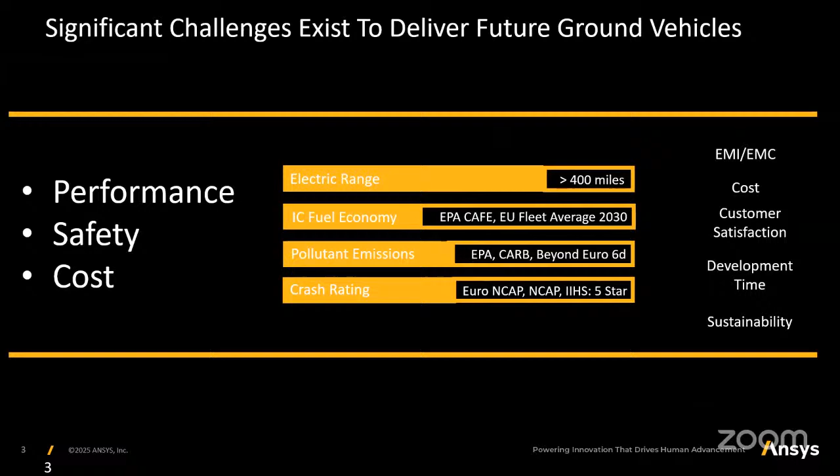Now, for the automotive manufacturer, the requirement is to speed up the design cycle so the product can be launched faster in the market, and at the same time it should be innovatively designed, so that new and unique characteristics give a competitive advantage over contemporary competitors and better customer acceptance because of these unique selling points. And when we develop the product faster, we are compressing the development cycle and making the products innovative.

We should also keep a tab on the development cost so that it does not increase too much, which would eventually increase the burden on the customer. So we need to make sure that the targets related to cost, weight, size and sustainability are met without increasing the overall cost of the vehicle.

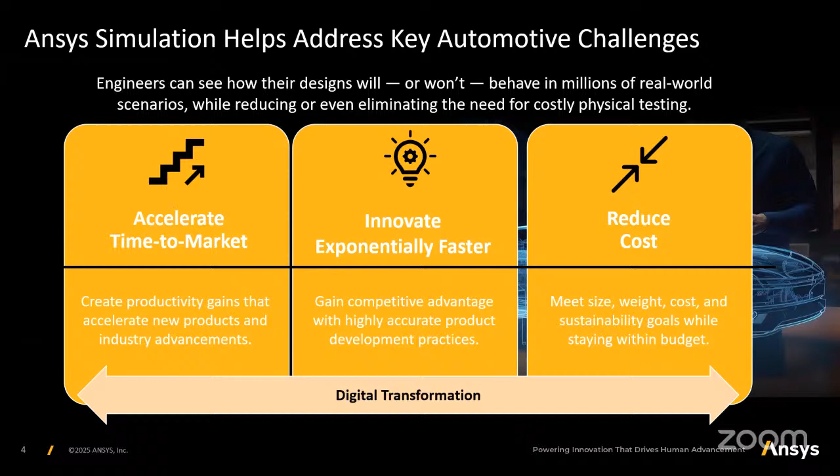So for that, the digital transformation will play a key role, and especially the Ansys simulation solutions will definitely help to address these automotive challenges. So if I just quantify a couple of benefits which customers would have seen by using simulation in the development of ground transportation vehicles, one is the gain in performance.

So if we have best practices employed and optimized settings and optimized design practices, then it will help us to increase simulation productivity. That means that in the same span of time, customers can now perform more and more simulations.

That means the customer now has the flexibility to evaluate multiple designs and all the possible scenarios before the product is manufactured or before the first prototype is built. So that will help to get optimal solutions, and that will also help to reduce the product development time significantly.

Another benefit the customer can see using simulation is a significant reduction in the product development cycle or design time. One of our customers based in North America, in the business of engine manufacturing, employed simulations and was able to run multiple design iterations upfront within days instead of months, speeding up their product development cycle significantly without compromising the quality of the product.

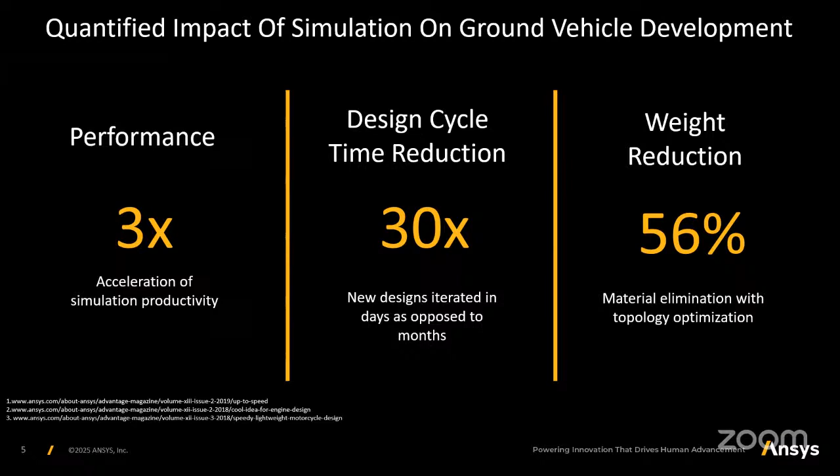In addition to these three use cases, there are multiple other avenues for conventional as well as electric powertrain vehicles to have better innovation at lower cost. Nowadays there is a lot of momentum for EV cars, and EV cars typically have batteries as well as e-motors. How efficiently we choose the battery packs and how we manage the thermal management of these batteries plays a very crucial role in the safety as well as the performance of the electric vehicle.

And we know that these electric vehicles will have the e-motor as the powertrain source, so the optimum design of electric motors using simulation also plays a crucial role. We can also employ simulations to make lighter vehicles, so that when the vehicle is lighter, its speed will be higher, but at the same time we should make sure that safety is not compromised. By using the additive manufacturing technique, we can design lightweight components and at the same time make sure that safety is intact.

Customers nowadays require that the noise emission from the vehicle be as low as possible, because that is one of the comfort parameters. It is no longer a luxury; noise comfort is one of the key attributes of automobiles. So by using simulations, we can improve the NVH design of these automobiles.

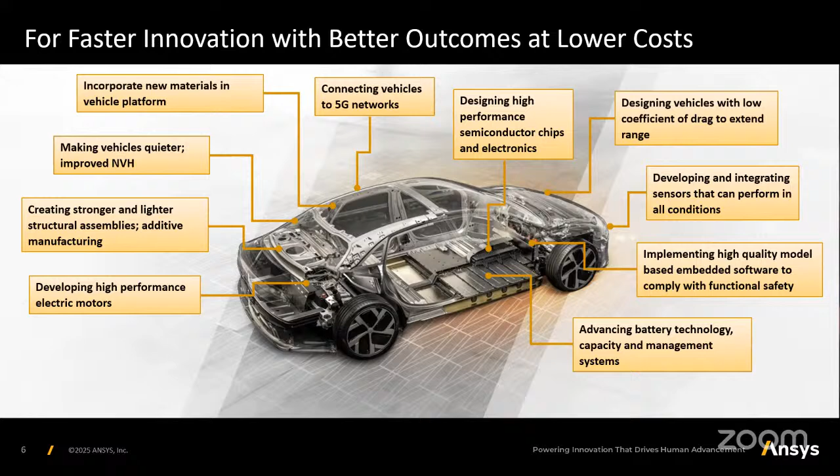So these are a few avenues where simulations will certainly help to have better innovative products, but at a lower cost. Let me now go one by one about how ANSYS can help to better design automotive systems and subsystems. If I broadly categorize vehicle engineering, it can be classified into five subcategories.

First is the exterior part. Next is the interior part of the automobile. Then is the chassis, followed by the powertrain, and the last one is electrical systems.

When we talk about exterior systems, it covers the aerodynamics part, external aeroacoustics, vehicle thermal management, dirt and water management, and lastly structural integrity.

When we talk about interior aspects, it covers the thermal comfort required by the passengers and co-passengers sitting inside the car, and crash worthiness of the vehicle is also very important, because whoever occupies the car should be safe enough in any eventuality. If there is a frontal collision or a side collision, passenger safety should not be compromised.

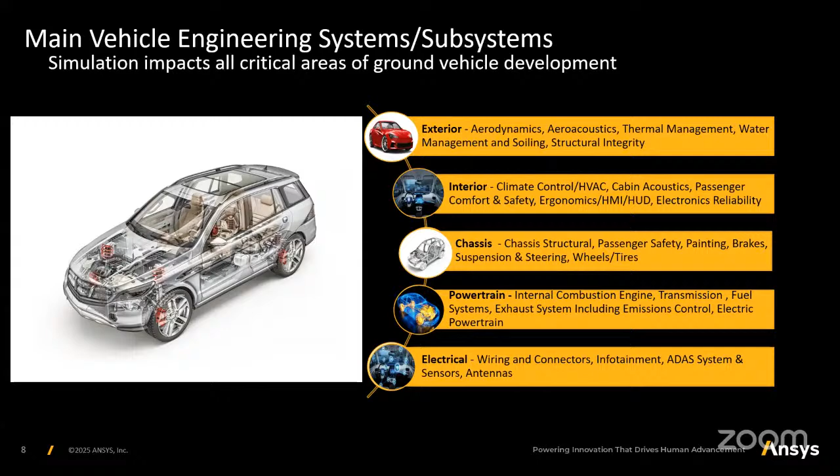There are lots of electronics gadgets or displays seen in modern automobiles, because more and more electronics is taking part in vehicle performance. And the entire vehicle is built on the chassis, so chassis structural integrity is equally important. We'll cover these aspects in detail in the subsequent slides.

Coming back to the first part, about how simulation will help achieve better exterior component performance. When we talk about exterior systems, mainly we talk about aerodynamics, aeroacoustics, thermal management, dirt management, water management, and structural integrity.

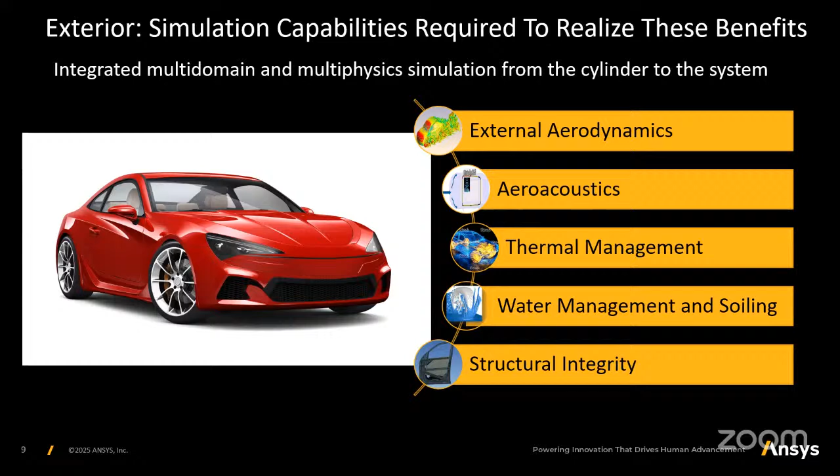We can use ANSYS CFD solutions, especially to optimize the drag coefficients or reduce them, so that the fuel economy of the conventional IC engine powered vehicle is improved. And if it is an electric powertrain vehicle, lower drag automatically means the range of the vehicle will increase, with less parasitic losses.

With the introduction of the Worldwide Harmonized Light Vehicle Test Procedures, it's important that all multiple configurations of automobiles are evaluated upfront and reported for drag coefficients, which affect the CAFE—corporate average fuel economy—or overall fuel economy. Using simulations, we can study these drag coefficients, optimize them, and identify the regions causing high drag in the vehicle so we can take corrective actions.

The next is acoustics. Acoustics is also a very important attribute in the selection of the automobile, especially in passenger cars. There are norms coming up like pass-by noise, and the passenger comfort parameter is decided by the noise coming from the engine as well as from external components.

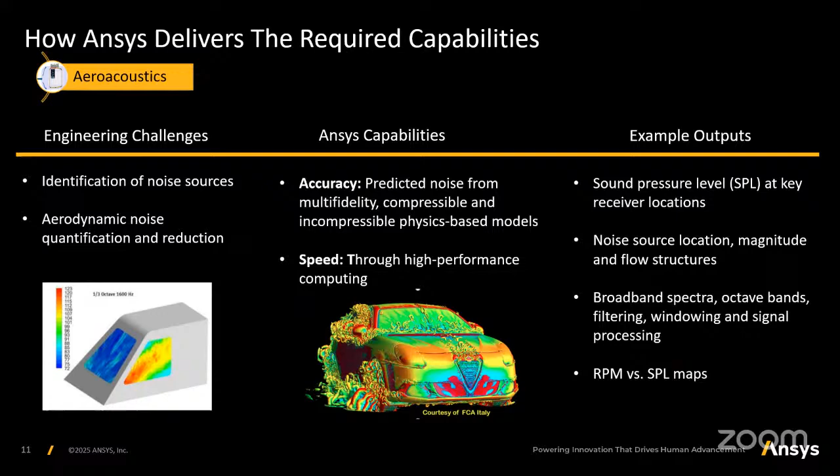We can study this aeroacoustic aspect of noise using CFD simulations, and we can quantify the noise sources and take corrective actions to reduce aerodynamic noise. We can use LES-type simulations using ANSYS Fluent, and calculate the noise at a distance—whether inside the vehicle or at co-passenger level—using this computational acoustic approach, and calculate the sound pressure level at receiver locations to make sure it is within acceptable limits.

Next is the requirement of thermal management. When a vehicle is there, inside the vehicle under the hood there is an engine, and the engine is the hottest component. It can radiate heat or convect heat to the adjoining components, which could be made up of plastic or rubber. If the temperature exceeds a certain specified limit, those components can underperform or get damaged and need to get replaced. So the objective of this thermal management study is to see the temperature of the adjacent components around the engine and make sure the temperature is not exceeding the specified limits.

Providing adequate cooling is also another requirement for the underhood thermal management system and the front end airflow systems. So using conjugate heat transfer simulations in ANSYS, one can evaluate the underhood thermal performance or thermal management of the vehicle and study whether it is adequate enough or needs any improvements.

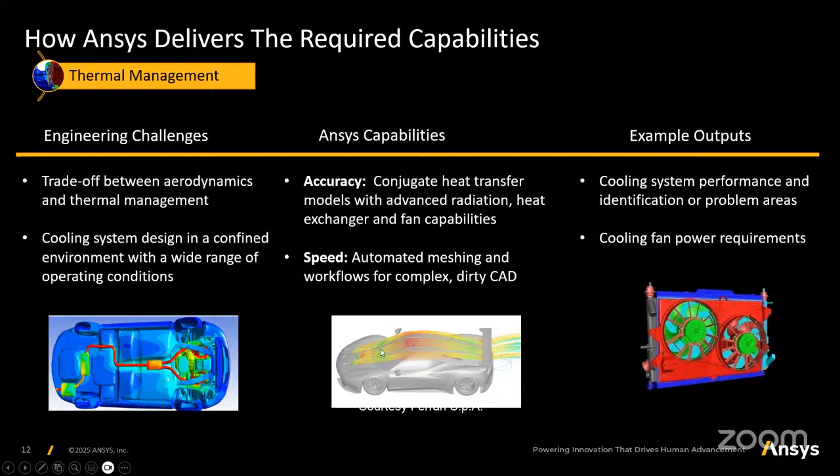The next part is the management of dirt or vehicle soiling. Especially when there are lots of sensors in the vehicle for its efficient operation, it's important that we study whether it is impacted by dirt or any adverse environment that it's able to handle or not.

So we can perform multi-phase simulation using ANSYS technology, especially ANSYS Fluent, to study the trajectory of soil particles or water droplets to see whether water is reaching the sensors and whether it is blocking the path or causing any damage to the sensor. Those kinds of scenarios will be easily evaluated using ANSYS simulations.

And especially if some film formation is happening, we can also quantify the extent to which the film is getting formed on the vehicle and on the sensor surface, because it can detrimentally affect the performance of the sensors. So it is important to evaluate whether the sensors are performing well in all conditions or not.

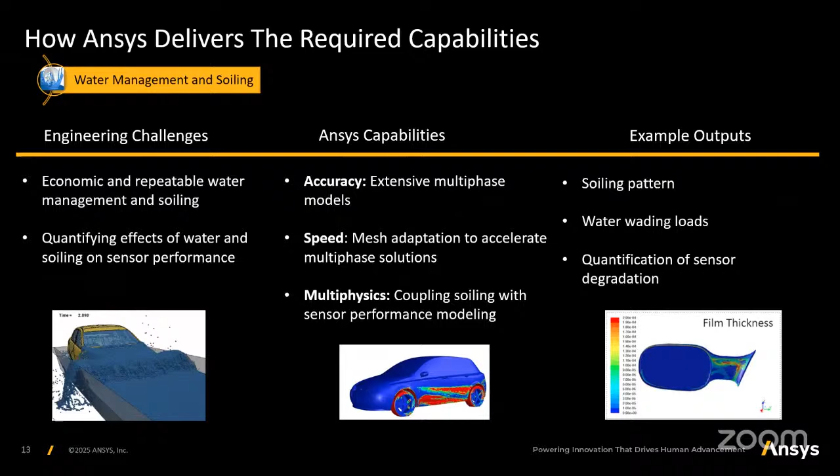The next aspect we can study using simulation in vehicle engineering is structural integrity or structural rigidity. That can be easily studied using simulations like ANSYS Mechanical.

The objective here is whether we are able to optimize the weight, and indirectly cost, without compromising the safety of the passengers. So we can perform structural integrity simulations using mechanical or crash simulation as well, and we can also study the durability of these components.

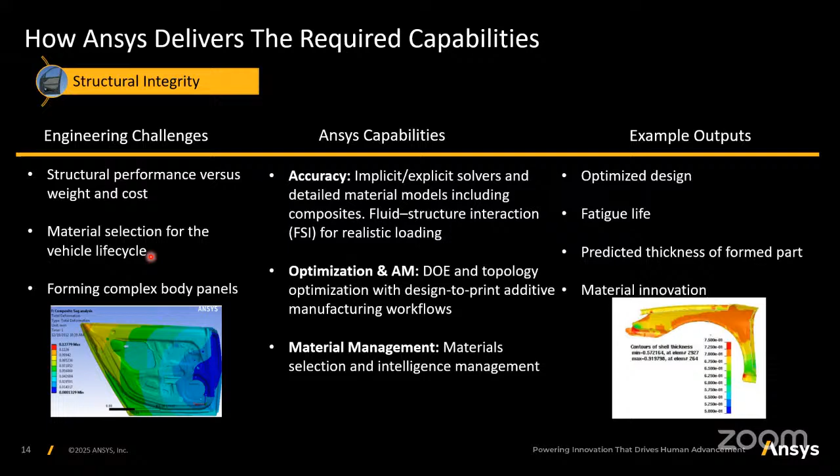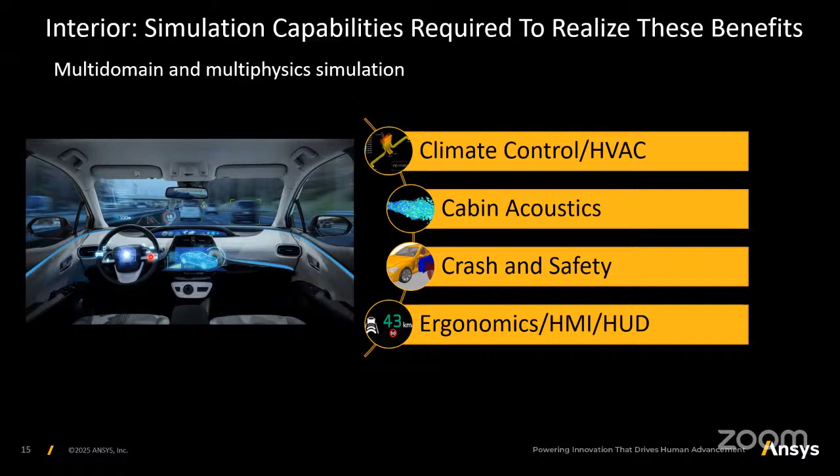The next aspect is interior vehicle engineering, which comprises climate control, cabin acoustics, crash, and ergonomics. Climate control is nothing but the vehicle's HVAC systems, or heating, ventilation, air conditioning systems, which are essential for passenger comfort, especially in colder geographies or colder weather. It should provide adequate heat, or when driving in hot summer, it should provide adequate cooling, so that passengers don't feel too hot or too cold.

That can be addressed using typical HVAC systems. Especially when driving in the rainy season, we see some kind of fogging happening on the front glass, and if that is not cleared up, it can affect visibility and there's a possibility of accidents. So defogging, and especially in cold environments where snowing is happening, de-icing is also a very important attribute of this HVAC system.

Using flow simulations, we can study the effect of air quality as well as the temperature near the seats which passengers experience, and accordingly modify the design so we can get better air quality as well as better temperature control around the passengers. We can also make sure that the defogging and de-icing system is working as expected.

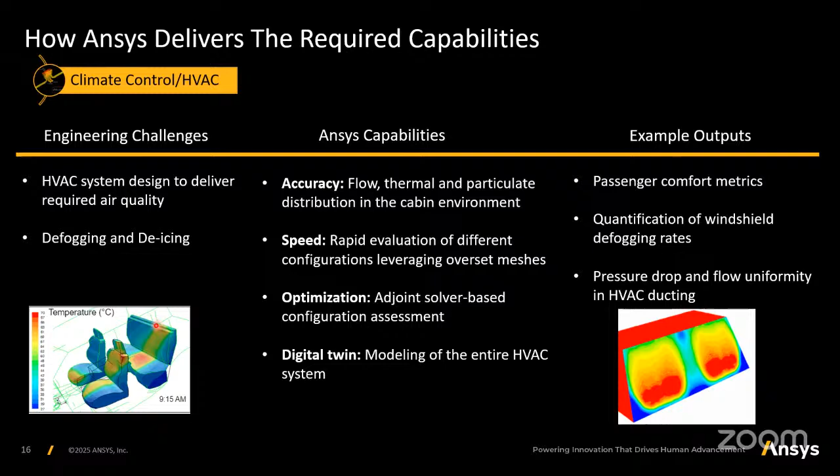Next part is related to acoustics. Passengers inside the car experience noise because of the side mirrors or external flow. This noise is transmitted to the glass panels and eventually heard by the drivers and co-drivers.

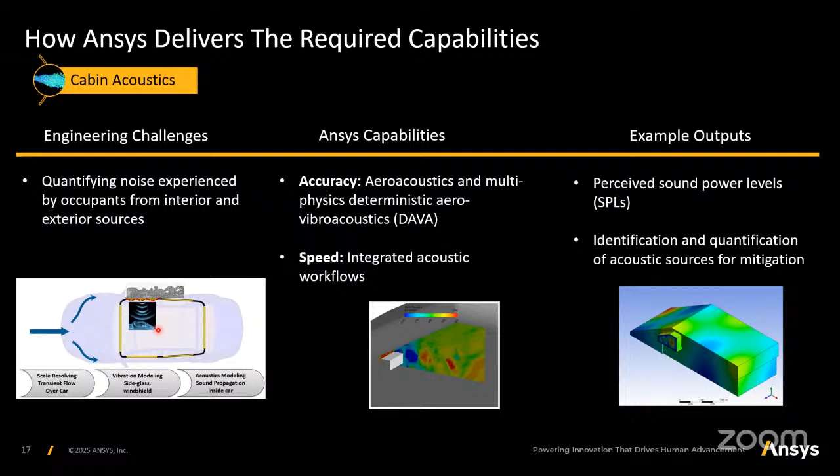By using the deterministic aero-vibroacoustic approach, we can study how noise is generated external to the vehicle and how this noise propagates from the exterior to the interior of the vehicle. We can estimate the sound pressure level at the passenger and co-passenger positions, and adequately take corrective actions to reduce the noise if it exceeds the specified limit. So we can get all the sound pressure level parameters and the location of the noise sources using simulations.

Another important aspect I mentioned earlier was crash worthiness. Passenger safety is paramount, especially in automobiles. In the event of any frontal or side collision, it is important that the airbags open in adequate time so that passengers do not have any major damage. That is the goal of crash worthiness.

By using simulations like LS-DYNA, we can check whether the crash worthiness of the vehicle is adequate or needs design modification. We can perform weight optimization without sacrificing the safety of the vehicle. These kinds of studies can be performed using simulations, especially LS-DYNA type simulations.

These crash tests are very costly in nature. If manufacturers typically have hundreds of variants, testing each one will increase development costs. Once the vehicle is damaged, it can no longer be salvaged or used—it's like destructive testing. So by using simulations, we can minimize the number of such expensive physical tests.

The next aspect of vehicle engineering is the chassis. The chassis comprises the entire body where different systems or subsystems are hosted. Important aspects of chassis design include structural integrity, crash worthiness in case of accidents, and dip painting or coating of vehicles before delivery. The effectiveness of painting can also be studied using simulations, and the performance of subsystems such as steering, suspension, or brake systems can be evaluated, as well as wheels and tires, all using simulation tools.

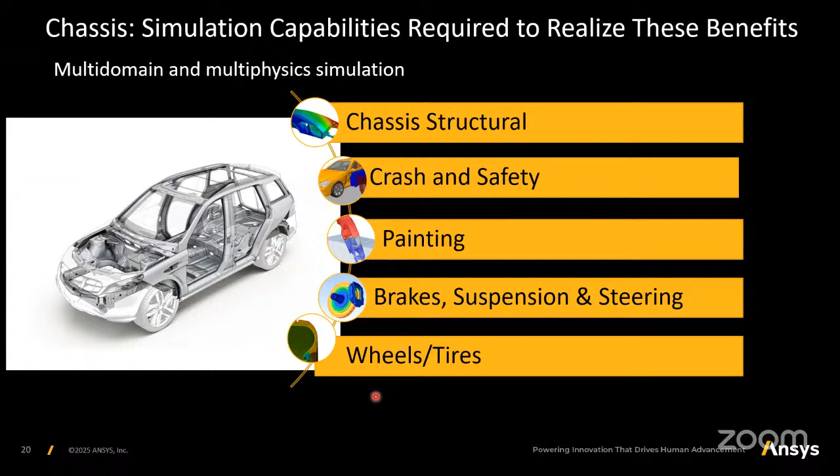First, let's talk about structural integrity of the chassis. It's important to maintain adequate strength without over-designing the vehicle, while optimizing weight so it doesn't increase cost or require excessive tooling or material cost. We can also appropriately choose materials for specified performance using simulations, and study the effects of wind loads or fluid-structure interaction when designing the chassis.

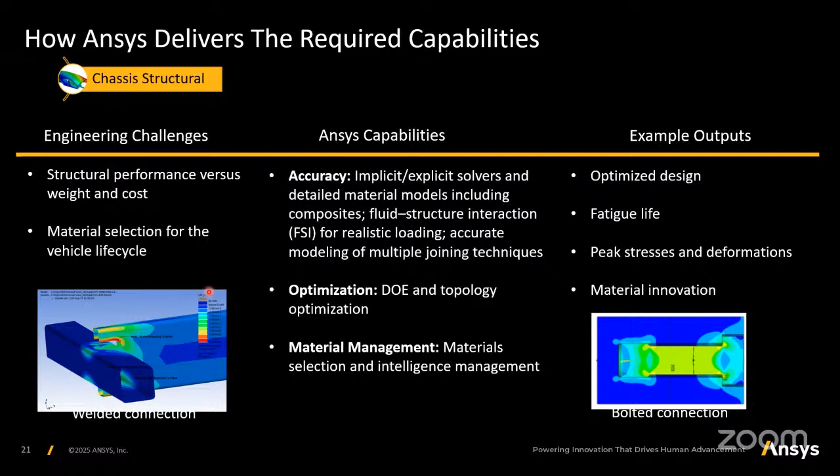The next aspect of chassis design is crash and safety. As mentioned earlier, regarding interior safety of co-passengers or drivers, in the event of a side or frontal impact, the vehicle chassis must be sufficiently resilient so that collisions are absorbed by the chassis itself and passengers inside remain intact. Using simulations, we can study all these aspects and significantly reduce expensive physical testing.

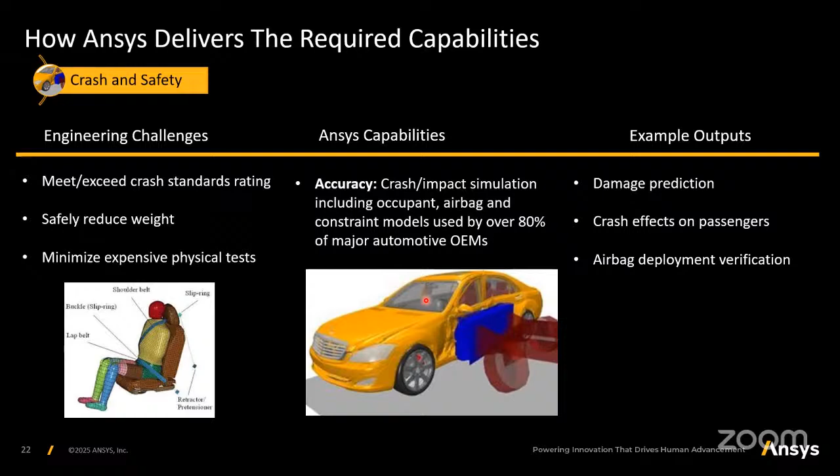For vehicle subsystems such as brakes, suspension, and steering, we can study thermal aspects of the brake or suspension systems, checking whether the heat generated during braking is dissipated adequately or if it could cause durability challenges if not managed properly. All these scenarios can be studied using simulation techniques.

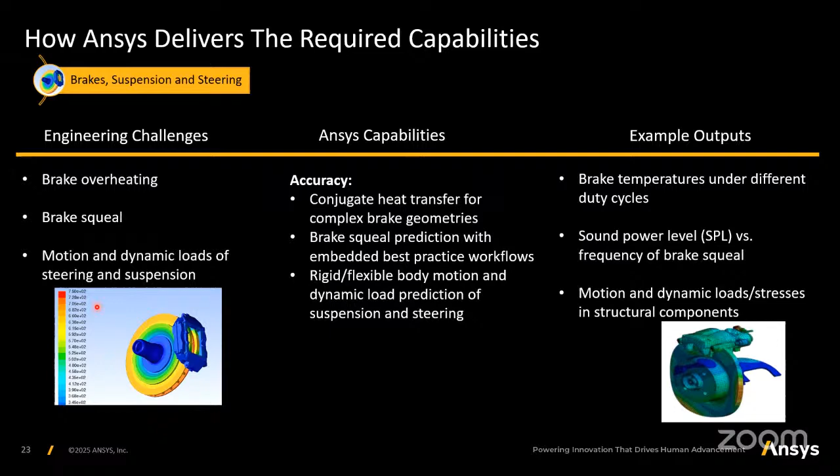Apart from thermal performance, brake squeal is another attribute we can evaluate using simulation—that unwanted noise, which we call squeal, can be calculated using simulations and addressed using simulation techniques.

The next aspect about the chassis is the painting part. It's important to study whether, when the vehicle goes through dip painting, any air pockets form. If air pockets occur, the quality of paint will be inferior in that region, leading to blind spots and requiring rework. This reduces the throughput of the production line and reduces the total number of vehicles produced in a given span of time.

To increase manufacturing productivity, we need to make sure these manufacturing processes are optimized and efficient enough. We can study this painting process using simulation technology like multi-phase simulations as well as thermal simulations, to see whether dead zones or air pockets are forming, how much time the dip painting activity takes, and how much time it takes for the paint to dry using the thermal part. All these aspects can be studied using simulation.

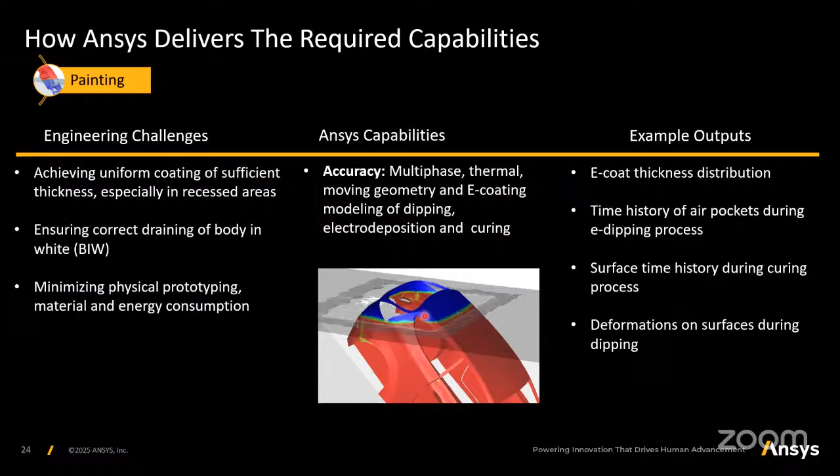When designing wheels and rims, we can optimize them for better weight, and check whether the material is good enough, and whether tire performance like the contact patch is good, whether rolling resistance is appropriate, and the footprint. We can also study noise generated because of hydroplaning effects, inflation of the tires, or rolling. All these aspects can be studied using simulation.

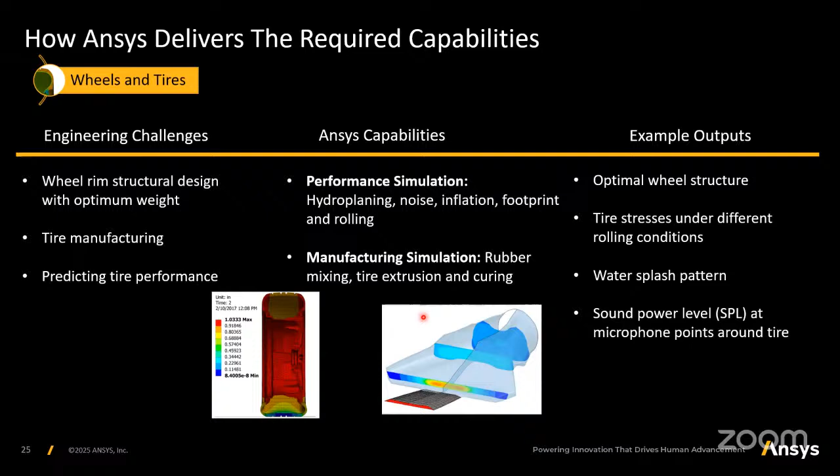The next aspect is related to the powertrain of the vehicle. Typically in the conventional powertrain, the internal combustion engine is the main source of power. In electric vehicles, the electric powertrain or e-motors are the source of power. Despite whatever the source of power, transmission would be required.

Especially if the conventional powertrain driven vehicle is there, we also need the fuel systems as well as the exhaust systems and after-treatment, because whatever exhaust comes from the engine cannot be directly discharged into the atmosphere in order to meet the emission regulatory norms.

When we want to design superior internal combustion engines, the objective is that the efficiency of the engine over different speeds is good enough, and we can study that aspect using the Ansys simulation solution called Forte. We can also study certain unwanted phenomena such as engine knock or engine noise using this simulation technique.

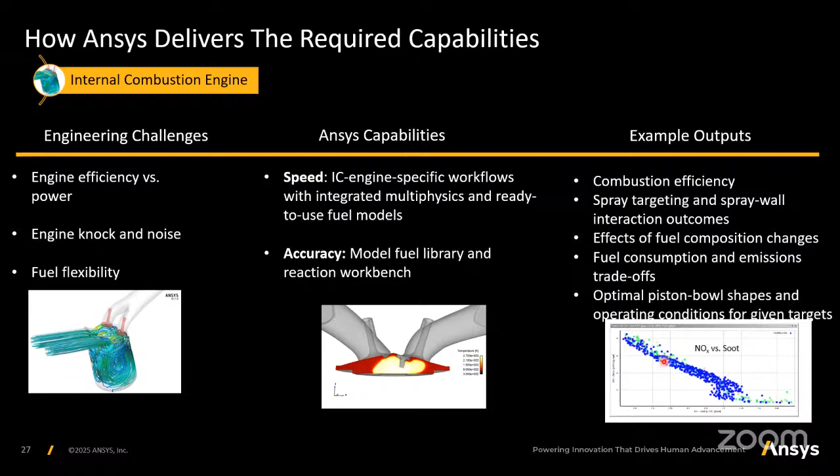We can also study, if we use different fuels, how suitable that fuel is, how much power it will generate, and what could be the consequence for noise norms. When we have different alternative fuels, we can always study their effectiveness in terms of engine efficiency, pollutant emissions, as well as other detrimental parameters like knock and noise generated. These kinds of studies we can perform upfront, before we perform the engine test bed test.

Another aspect of the powertrain is the design of an efficient transmission system. What losses are encountered in the powertrain? These affect the fuel economy of the vehicle, and eventually increase greenhouse emissions, or affect the range of electric vehicles.

We can estimate these different churning losses or viscous losses using simulation techniques, and at the same time we can also estimate the noise generated because of mating gears as well as flashing, using the NVH tools of Ansys. All these studies can be performed using Ansys Mechanical and Ansys CFD solutions.

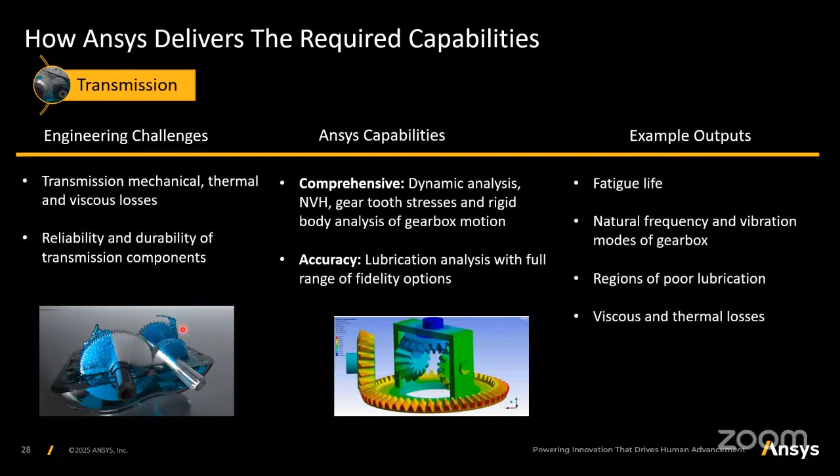In the case of a conventional powertrain driven vehicle, it's important to make sure the fuel systems we employ are efficient enough, and that the fuel injected into the combustion chamber gets atomized properly before it mixes with the air. This directly affects the combustion efficiency of the engine, and indirectly affects the fuel economy of the vehicle. The power generated out of this engine is a strong function of how good the fuel-air mix is, which indirectly depends on how good the atomization is.

We can study the effectiveness of atomization in simulation techniques, and also the flow rate of the fuel system pump delivering fuel from the tank to the engine. All these aspects help us estimate the losses and the pump efficiency. Another important aspect is the noise generated by the pump operation, which can also be estimated using simulation.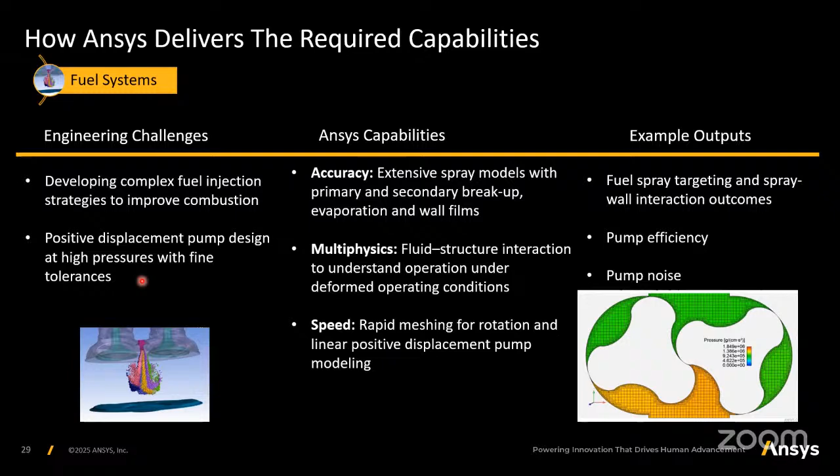In conventional powertrain driven vehicles, it is necessary to employ after-treatment devices. In petrol engines we use three-way catalytic converters. In diesel engines we need selective catalytic reduction to reduce NOx, as well as diesel oxidation catalysts to reduce hydrocarbon and carbon monoxide emissions. How effectively these systems can be designed can be studied using simulations.

These are high temperature exposed components, and because of thermal stresses, structural integrity can be compromised. So it's important to evaluate structural integrity and durability before they are productionized or employed in the actual vehicle. Using simulation techniques, we can perform conjugate heat transfer simulations to get the temperature map of these components, check if the light-off temperature is sufficient, and use that temperature map to calculate thermal distortions and whether they cause structural issues.

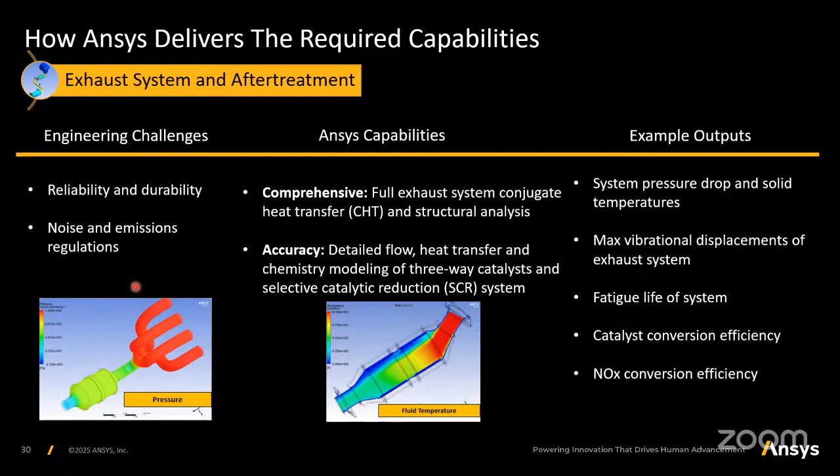In case of EVs, electric motors are used as the source of the powertrain, and we can study the cooling of these motors using simulations, whether direct or indirect cooling. We check whether the motor cooling system is reliable enough so that the motor windings or magnets are not exposed to very high temperatures for prolonged time, because that would significantly affect performance, resulting in loss of torque, loss of range, or reduced efficiency, meaning overall reduced fuel economy.

At the same time, this motor can generate noise, which affects the customer's comfort parameter. If noise is very high, it affects customer comfort, so we need to optimize for better noise characteristics. We can study temperature history and motor noise using ANSYS simulation techniques, performing CFD simulations to estimate temperature on different motor components. We can also study the electric motor using ANSYS Maxwell to study forces, and use that force information for noise signature estimation. All these effects can be studied using simulation.

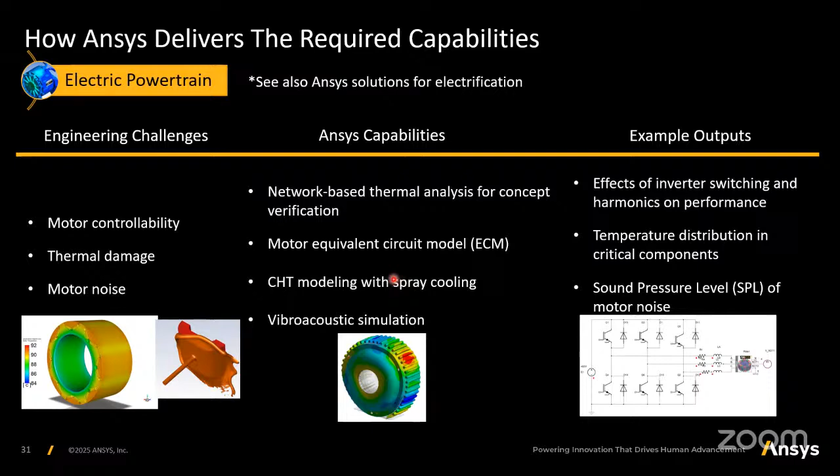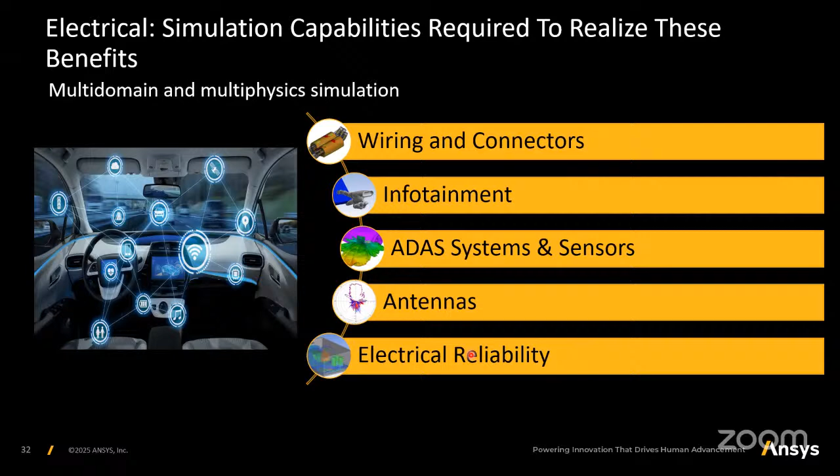Coming to the last aspect, electrical systems: lots of electric wiring harnesses and connectors are part of the modern automobile. The infotainment system is also playing a very important role and is critical in all modern automobile systems. Advanced driver assistance systems and the sensors used in ADAS or autonomous vehicles need to be evaluated critically. Since there are antennas on the vehicle to communicate between the tower and the vehicle, as well as between two adjacent vehicles, the placement and performance of the antenna also play a crucial role in the design of such vehicles. Finally, the reliability of such electrical systems is very important for consistent vehicle performance.

So by using the Ansys simulation, we can study the wiring harnesses, especially the electromagnetic interference or electromagnetic compatibility, basically using the Ansys electronic solutions. And we can study whether there is crosstalk or whether there is radiation, electromagnetic radiation, or how much is the susceptibility, how much is the immunity. So all these aspects can be studied using the Ansys electronic solutions. These parameters are very important to design the shielding effectiveness.

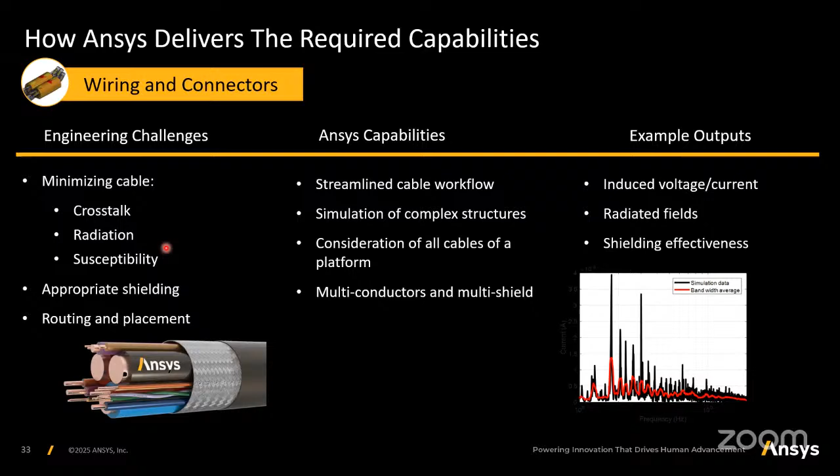Now, the next part is infotainment. The infotainment system is nothing but a printed circuit board where there will be lots of chips, and it will carry a lot of electric current. So it will generate a lot of heat, and if it is not managed properly, eventually there is a chance that this printed circuit board may get overheated or it may get bent because of the non-uniform heating and the distortion because of the high temperatures.

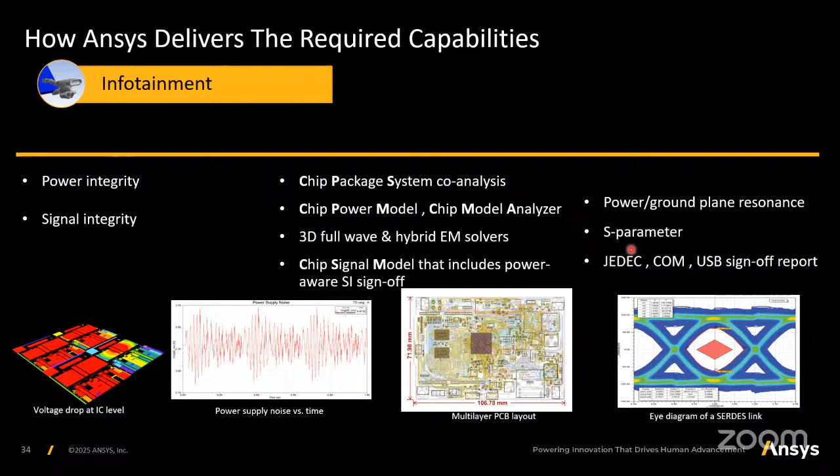So by using the simulations, we can study the chip level, package level, or all. Using the simulation, we can study the power integrity as well as the signal integrity, and we can estimate parameters such as S parameters or the resonance aspects.

So the next aspect is ADAS or the autonomous vehicle. Here the important consideration is that in any kind of eventuality, in case of inclement weather or lighting conditions like snow, rain, or night, it should perform effectively. All these sensors are placed on these vehicles to study the different parameters, so they should perform without any deterioration in performance in all weather conditions. That is a requirement.

So using the simulations, we can see all these aspects, and we can make sure that we are not getting the wrong signals and we are not getting incorrect ones, so they are performing as expected.

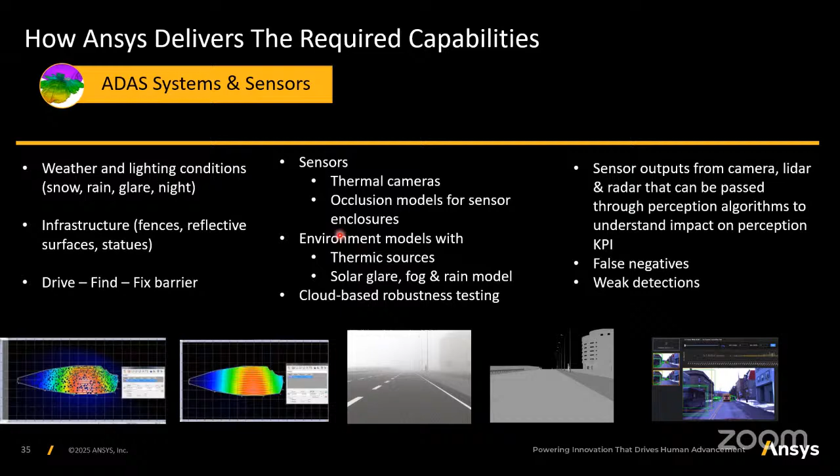Especially in the case of connected vehicles, the antennas are very critical, and they play a crucial role in the communication between the tower and vehicle as well as between two adjacent vehicles. So we can perform the placement of the antenna, and we can also study the radiation pattern of the antenna using the Ansys electronic simulations. That will help to see whether the gains of this antenna are good enough, or whether we need multiple antennas, or can work with a single antenna. All these aspects can be studied using simulation techniques.

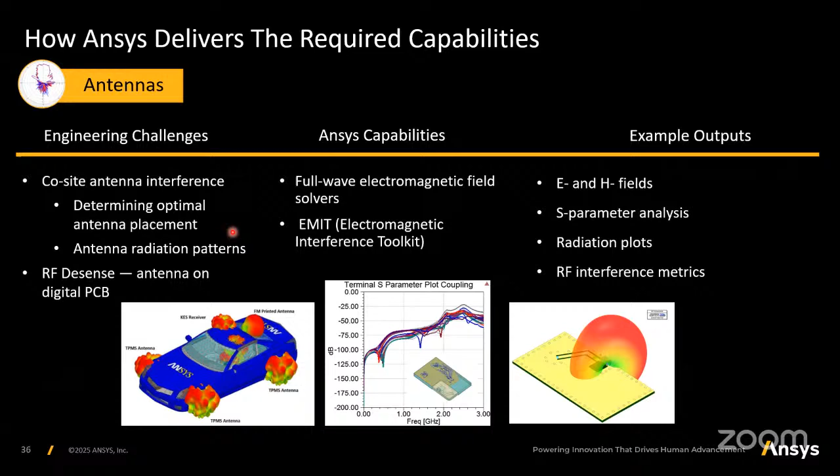Now, lastly, is electronics reliability. Electronics reliability, especially in terms of power integrity and signal integrity, is very critical, and the objective here is to increase power integrity and signal integrity. So we can study DCIR losses, or we can do the chip package system analysis using the Ansys EM solvers to see whether signal integrity and power integrity are as per expectations or not.

So these are the different outputs we can get from the electromagnetic simulation, like EMI, EMC, S parameters, or eye diagrams or waveforms. This will help electronics engineers make sure the effectiveness of this electronic system is not compromised and it is as high as possible.

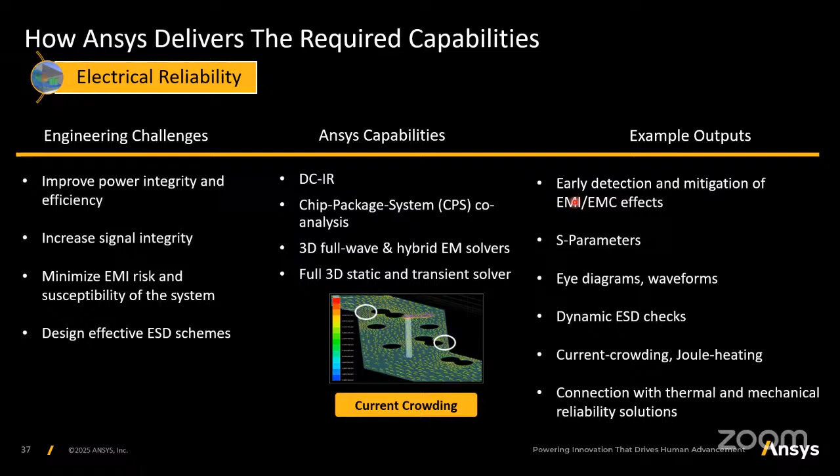So these are a couple of customer success stories where customers were able to increase simulation productivity, especially this use case by Ferrari, which is famous for Formula One racing as well as motor car racing. By using simulation, Ferrari could evaluate three times more design iterations within the same span of time. That means they could optimize the designs faster, and they could get the right solutions with a first-time-right approach.

Next is effective engine cooling system design using simulation. This customer is based out of North America, and by using simulation, they were able to increase the efficiency of the petrol engine as well as the diesel engine compared to contemporary vehicles or competitors. They were able to evaluate multiple designs upfront before the prototype was built. That way, their product development cycle was reduced from years or months to days, which helps compress product development cycles and accelerate the time to market.

And this is the case I was talking about earlier, optimizing the weight of this motorcycle so that its high speed performance is not compromised. By using simulations, especially the topology optimization of Ansys Mechanical, this customer was able to reduce the weight of the vehicle by almost 56% by using a carbon monocoque frame optimized with the topology optimization technique of Ansys.

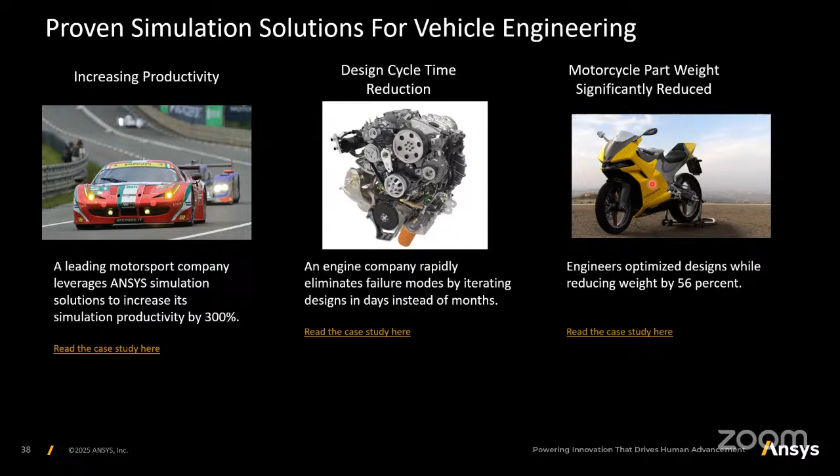So that way they were able to make the entire vehicle almost 56% lighter than earlier. That is a significant number. Now, in addition to this conventional vehicle engineering, we can see there are lots of mega trends.

So now with all the modern vehicles, lots of automobile original equipment manufacturer companies are working on ADAS or autonomous vehicles or e-mobility. There, the computer plays a vital role, and electrical plays a more and more crucial role. We are having lots of electronic sensors and a lot of electrical systems.

So these are the important aspects that need to be considered, like 5G connectivity or communication, Ethernet communication, or cybersecurity. Because in the case of software-defined vehicles, the entire vehicle is controlled by the software, and we should make sure that it is not susceptible to any cyber attacks. And whatever cyber attacks take place, a fail-proof system is in place.

So all these aspects we can study using ANSYS simulations, in addition to optimizing the material technology, making this lighter, using composites, or addressing pedestrian safety as well as active safety. So all these aspects need to be considered for all the modern vehicles.

And we see that now a multidisciplinary problem is being addressed. There is electrical, there is electronics, then there are mechanical systems where we want to optimize the drag or weight. We want to use composites, and we are having software. That means multiple departments will be involved in vehicle development, and collaboration between these departments is very, very important for the first-time-right philosophy. So by using simulations, we can make sure that we have better products at the end.

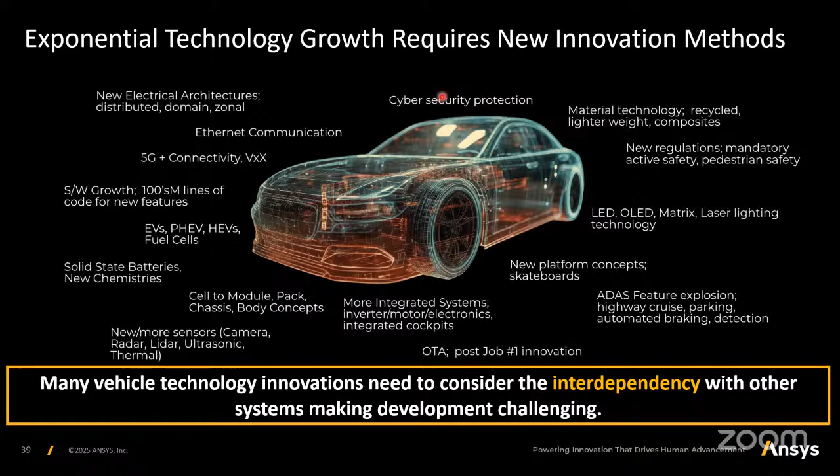So if we see these mega trends, the latest ones are electric mobility, advanced driver assist systems, autonomous vehicles, as well as software-defined vehicles, and all the automobile companies are seriously experiencing cost pressure. When they want to integrate lots of new capabilities or features in vehicles, at the same time the cost should not increase.

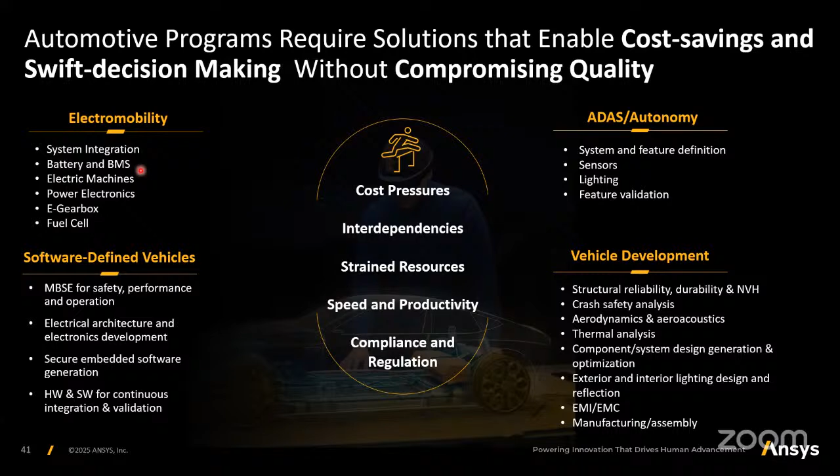And different departments are working on the development of the vehicles. So we need to make sure that there is close collaboration between the departments, and all the different scenarios are evaluated upfront before we productionize that vehicle. At the same time, the development cycle also needs to be compressed as much as possible, so the speed of product development should be high. That means we need better quality in the design stage, and we need to meet the norms as well. All these aspects can be addressed using simulation. We'll see that in the subsequent slides.

In the case of software-defined vehicles, typically the main challenge is that we need to evaluate different design scenarios, and verification is also important. So before physically testing the vehicle, we need to evaluate these scenarios using some kind of virtualization or virtual simulators, because we cannot deploy an actual physical prototype every time to test the scenarios; that would increase the overall development cost. So this verification and design complexity needs to be addressed in software-defined vehicles.

Using simulations, especially model-based system engineering, we can do lots of virtualization, and we can choose a better architecture for the electrical systems. ANSYS especially offers well-proven, foolproof systems to develop embedded software code which meets the compliance norms, and the chip and PCB board can also be studied. And cybersecurity is very, very important in software-defined vehicles. So all these aspects we can study using simulation techniques.

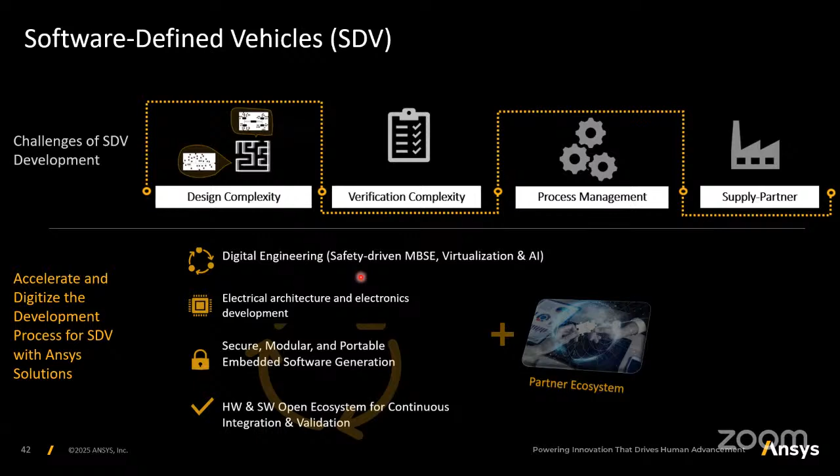So this is one success story from Robert Bosch, where they used an open platform system architecture like COVESA to increase the range of the vehicle by optimizing the battery range. By using ROMs or digital twins of the entire vehicle, we can quickly optimize or evaluate designs compared to conventional 3D simulations. We can also integrate different attributes from the cloud into the digital twin using the COVESA vehicle API. That was done by this customer, and it helped them make better inroads in software-defined vehicle development.

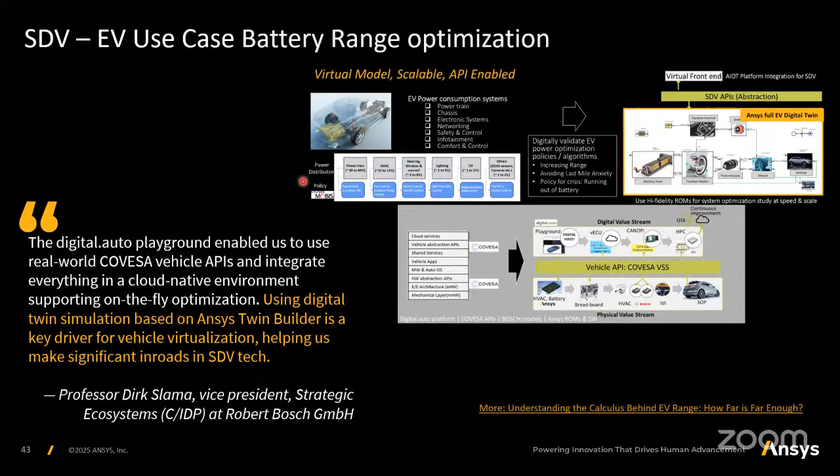So if we see the case of software-defined vehicles, typically the different aspects we can study using the simulation are like the reliability of the automotive electronics. A lot of sensors will be there, a lot of electronics will be employed when we are controlling the movement of the vehicle or operation of vehicles. So reliability of the automotive electronics is very, very crucial. Then since it is software driven, the entire thing is controlled by software, so functional safety is very, very important.

So all the scenarios, basically the functional modes of failure or different failure modes, need to be studied upfront before we productionize this vehicle. And for that, especially when we are using these embedded software systems, we need to make sure that whatever code is generated by this embedded software is compliant enough as per the global standards like IEC standards or electronic standards. And the last thing is the placement of the antenna and design of antenna can also be studied using the ANSYS simulation techniques.

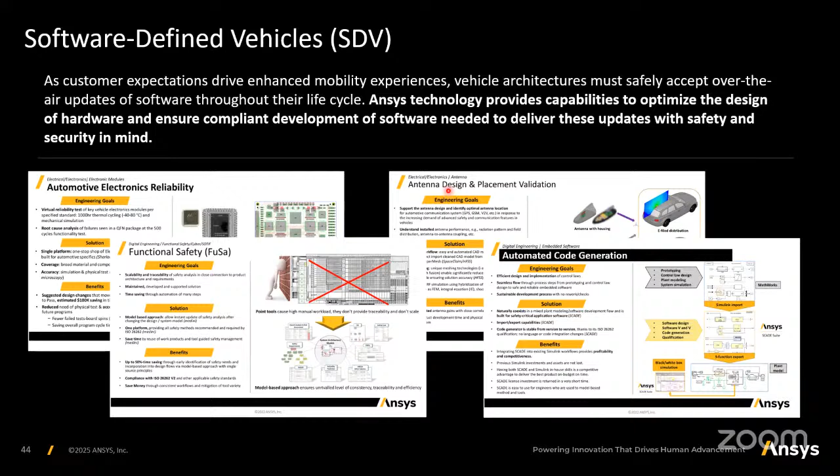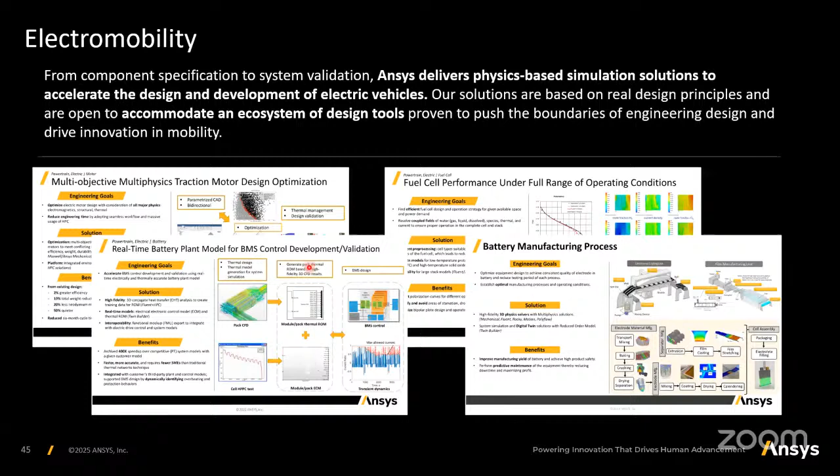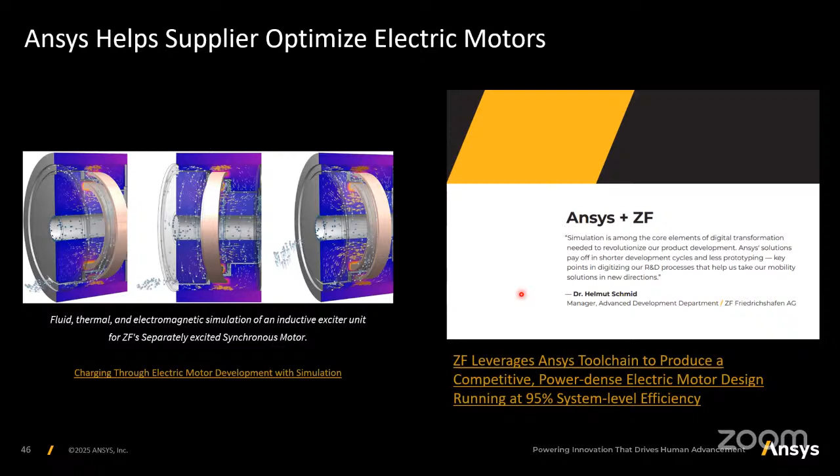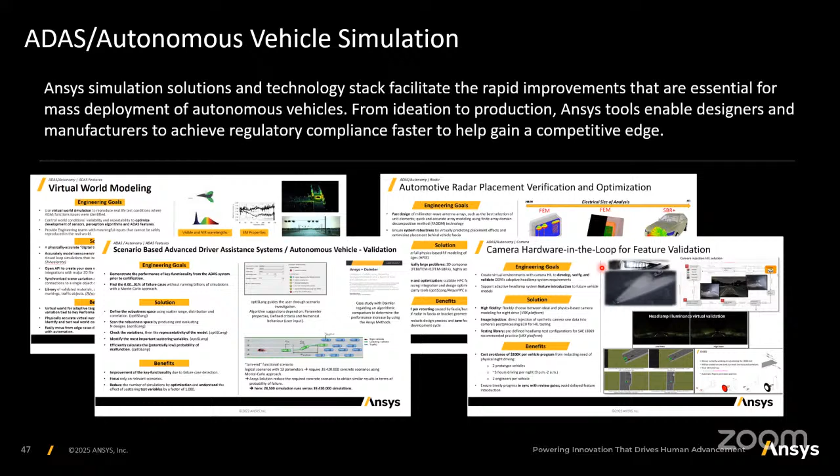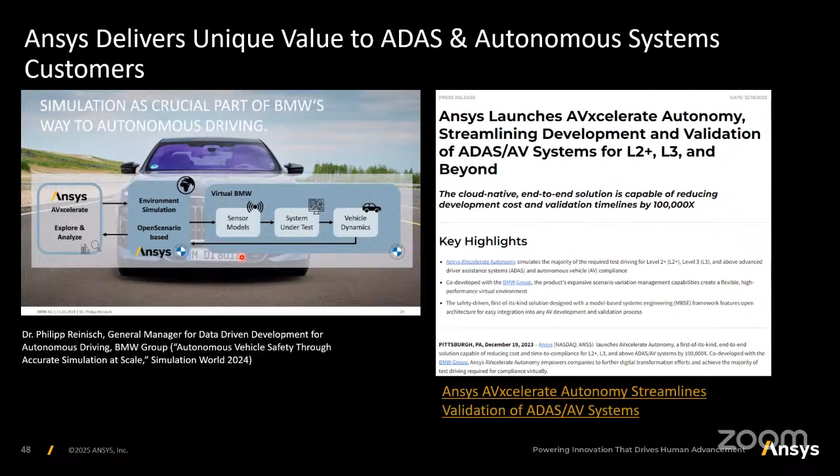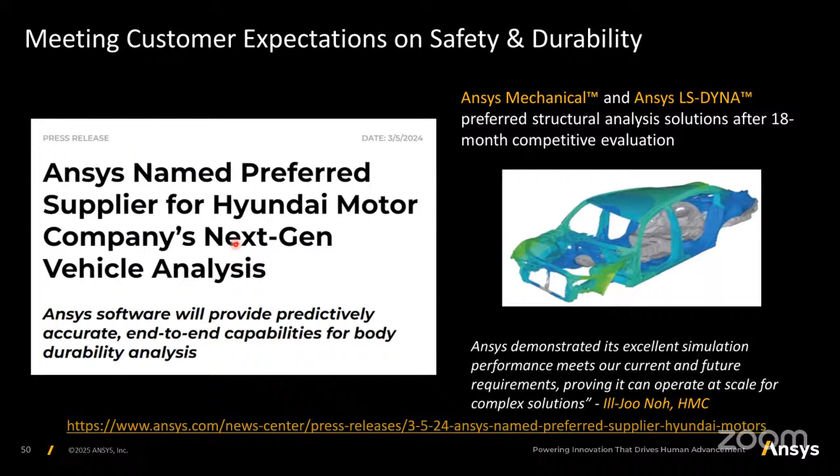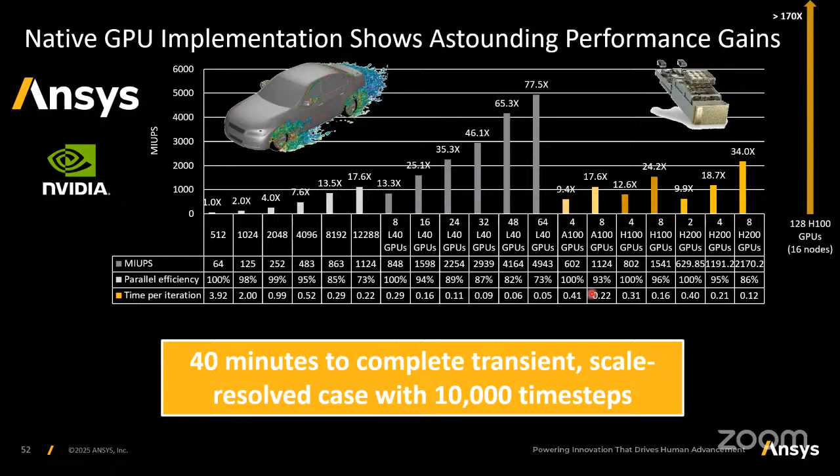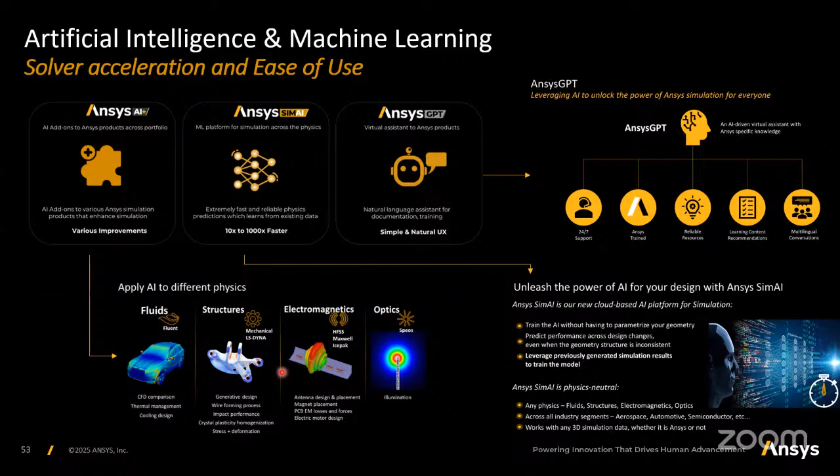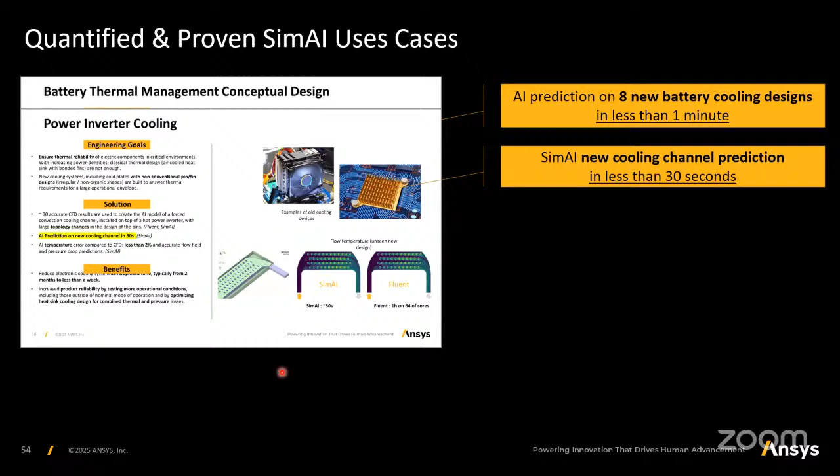On the other hand, when we have historic data, we can make use of that data and feed it to the SimAI platform, and it will be used for the training purpose. When a new design or new concept is to be evaluated, without performing 3D simulations, we can get the performance using this SimAI solver or technique. So that is the advantage.

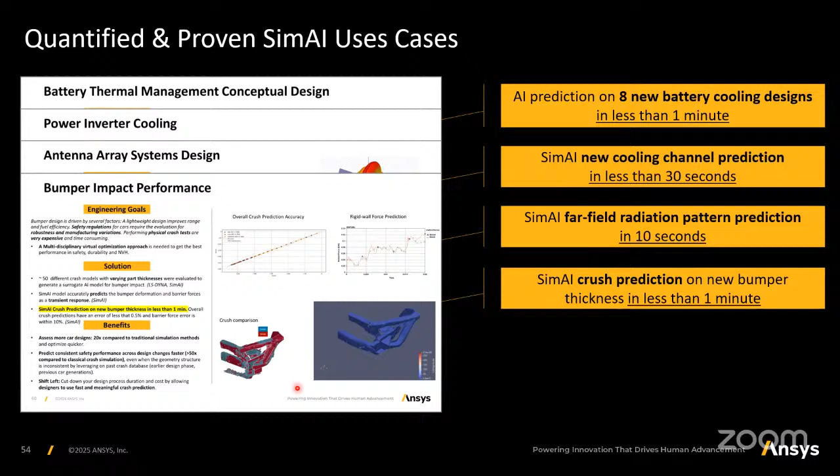These are a couple of use cases like battery thermal management, inverter cooling, placement of antenna design, or bumper performance. This is totally physics agnostic because it is purely based on the data which we provide in terms of geometry.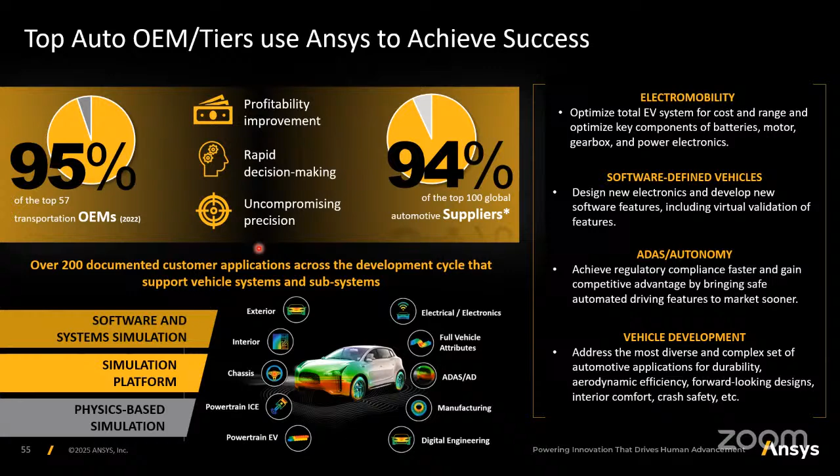Just lastly, I would like to say that 95% of the top 57 OEMs are trusting ANSYS for automobile system designs in terms of supplier footprint. Almost 94% of the top global 100 suppliers are relying on ANSYS solutions for betterment of their products. I would like to summarize that ANSYS has several proven solutions to address the needs of the current as well as future automotive industry.